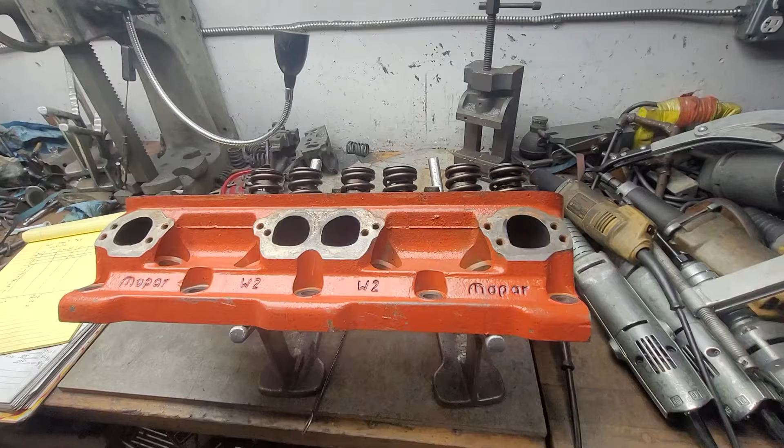Hey everybody, back here at Charlie's place, and we have here today a Mopar W2 head.

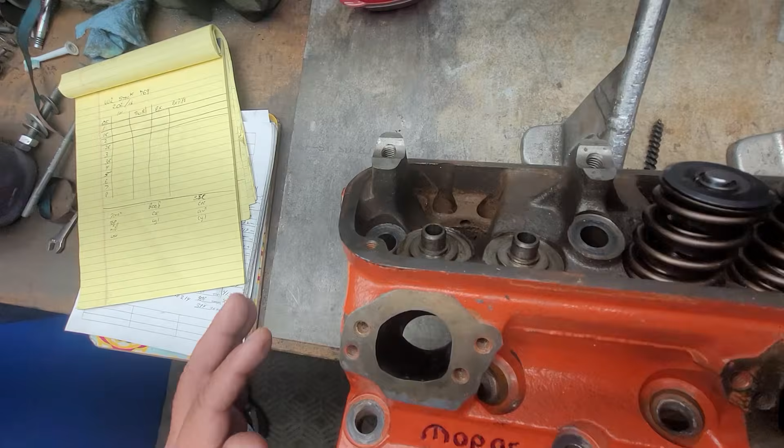This one is dual drilled for different size header flanges. It's the Econo version because it has the rocker pedestal stands in. The valve stems are 3/8. We didn't change them from what Mopar gave out and said to use. We'll see how they flow. These particular units are an open chamber design. I don't know how well you can see those, but we'll get to these later.

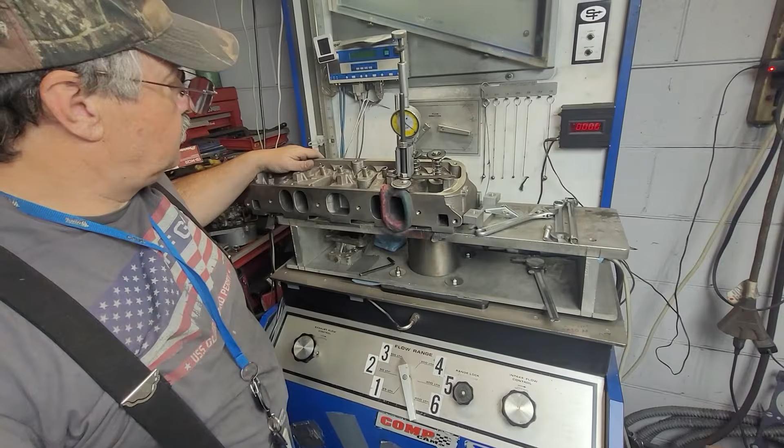Right now on the flow bench, we have an out of the box, never used, first time with valves in it, W2 head race version with the milled stands. So you have to put an aluminum stand here and then your rocker bar across. 2.02, 1.60, 3/8 stems. The boss is added on here to make them a little stronger, and they only have a single wide exhaust bolt pattern. This is a pretty stout head.

It's a 769 casting, and we're going to flow them, see what it does out of the box. No port work whatsoever. Fire in the hole.

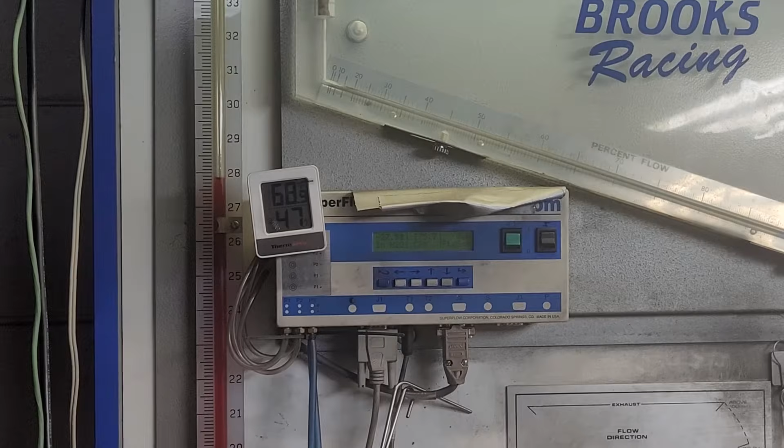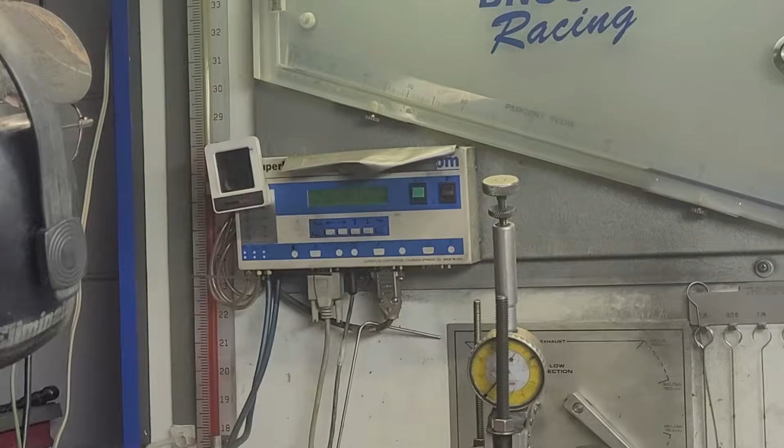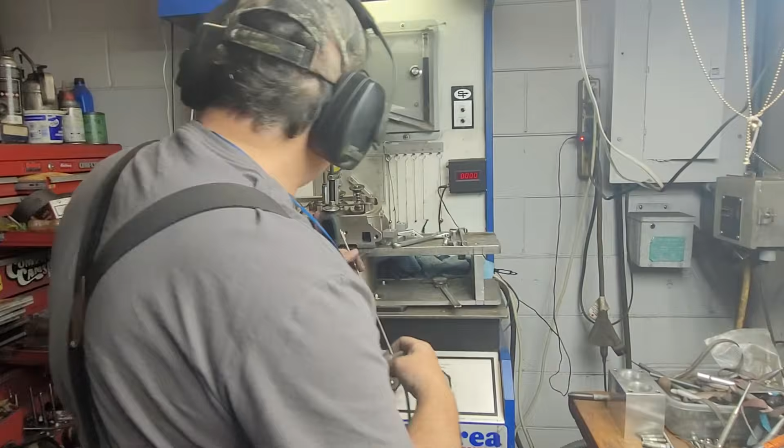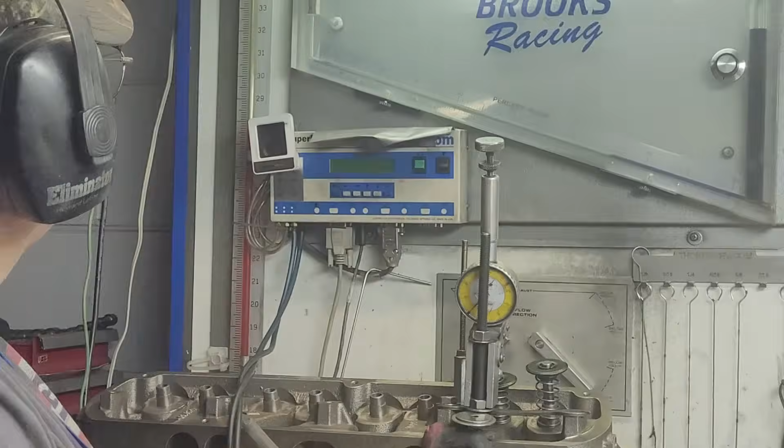Still rolling. All right. Pause it. Why don't we do the exhaust? Okay. Pause it. Unpaused, exhaust flow. Exhaust flow. Yep. Let's go. Pause. All right. Take two.

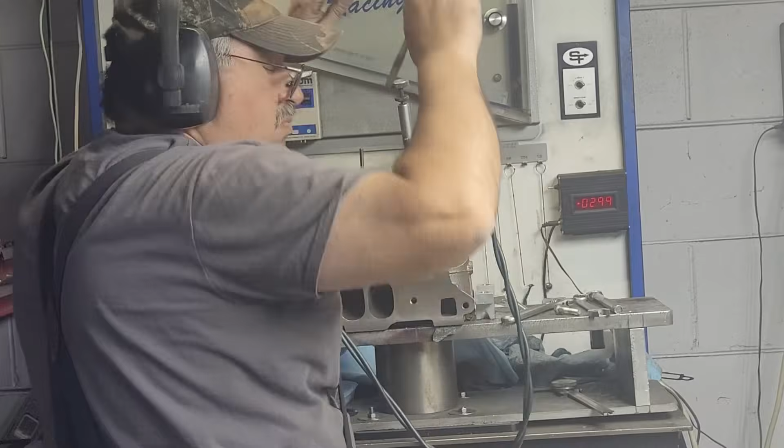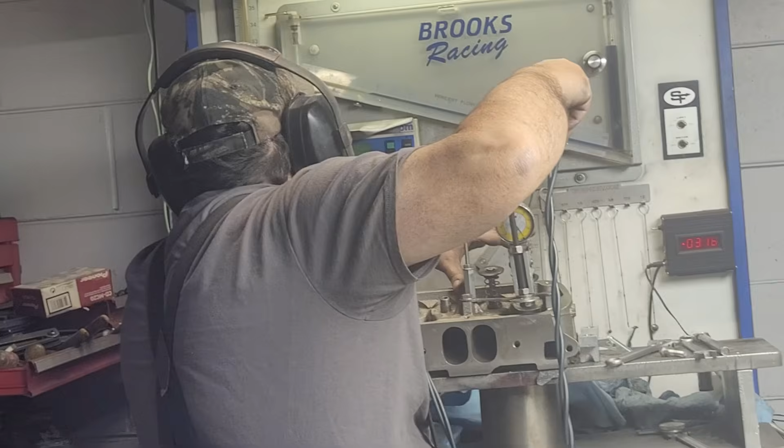All right, interesting stuff, guys. I'd like to thank Rob for bringing this by so we can have it as a reference. And when I first looked at it, first of all, absolutely love the head, right? Love it. I think it's a great design.

Rob, how many CFM did I say the intake would flow when I looked at it? When looking at it, you called 280. And how much did it flow? Well, the magic is 280.5. 280.5. All right, it was a lucky guess, but there was more than just guessing in that. Well, you do it enough, you kind of see things. Now, I definitely did not call the exhaust port. No, you missed it. No, I missed the exhaust port by about 80 CFM.

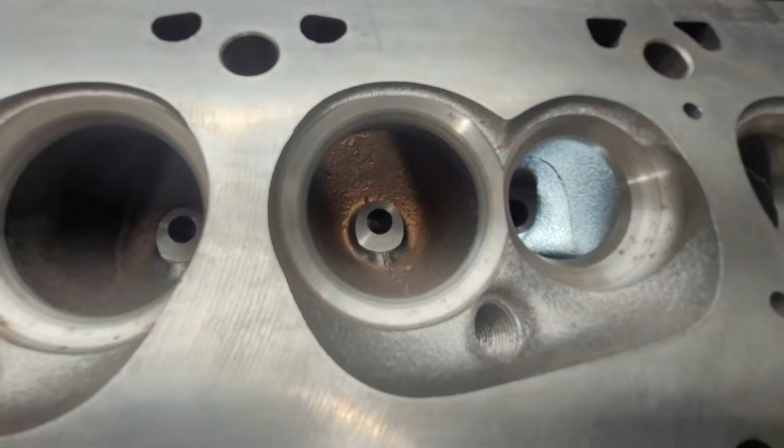The exhaust port, even though it looks like a great design, does not move a huge amount of air. Now, I'm willing to bet that's because of the way the throat was done. You know what we're going to do? We're going to pull it off the bench and we're going to take a look at it. All right, guys. Hopefully that wasn't too boring. Take a good look at these. These are really, really nice.

Now, some of the things we just took a quick look at, these are completely stock. So take a look at the valve job. All right, the throat ratio on the exhaust is really tight. It's only 81%. So that is definitely holding us up. And our intake throat ratio is 87%. Not as bad, but still a little bit below where we'd like to see it.

Okay. This is the valve job from Direct Connection. Is it Direct Connection or Mopar? Yep. Mopar Performance Direct Connection. Synonymous. This also has a different chamber. This has got a nice tight closed chamber. Really like the chamber on this. Depending upon what's going on, I would probably relieve these a little bit like I do on the Fuelies.

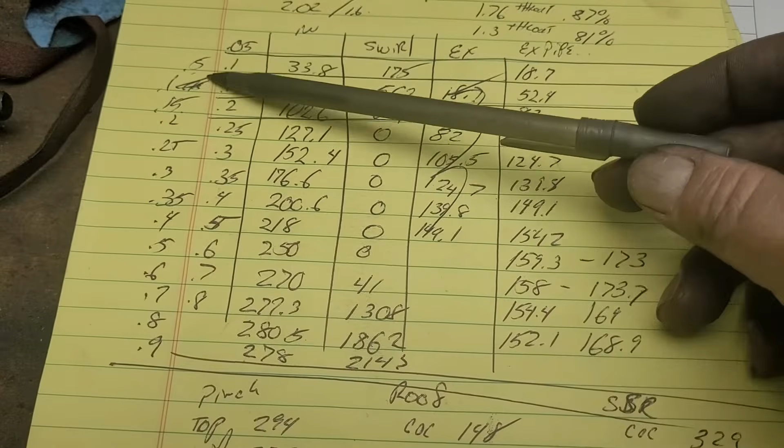I hate to do it, but I don't have a flow sheet. Wifey's having problems with the printer. So this is what we got. And yes, it's got a dozen mistakes on it because for some reason I wasn't able to keep the lifts straight. So this is no good here.

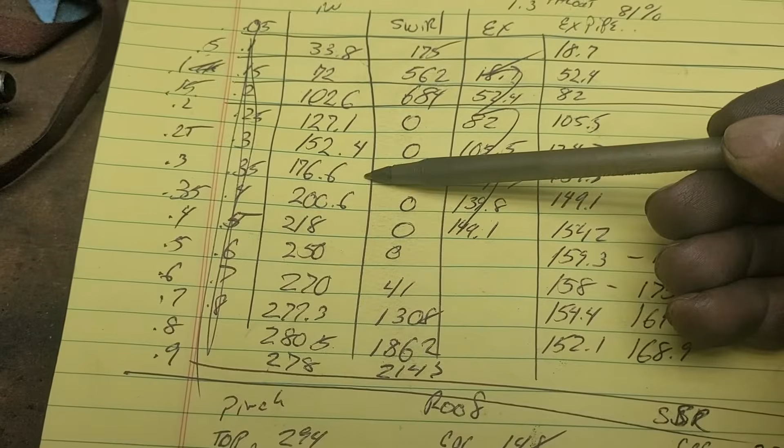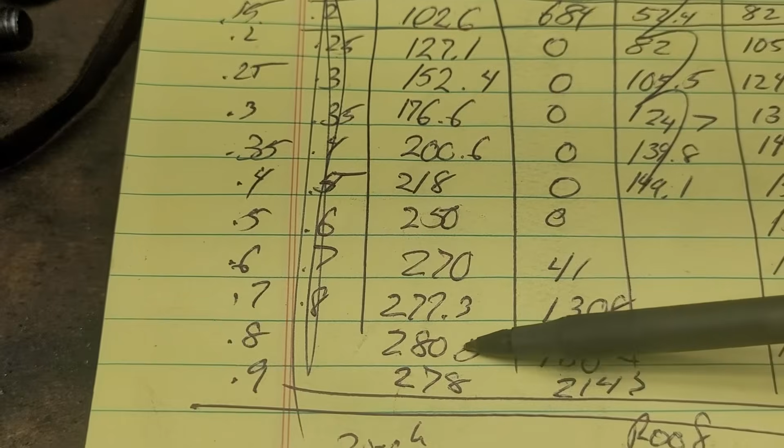Okay. Here are our lifts. This is where we are at .300. We got 176.6. Not great. I should take a look at the valves. Now the valve, no back cut on that intake. So if we add a back cut, we'll pick up quite a bit right in this mid-range here. Tops out pretty good though. Now, a back cut may lower that a touch. Depending upon the RPM that Rob's going to spin this, it would stay no back cut.

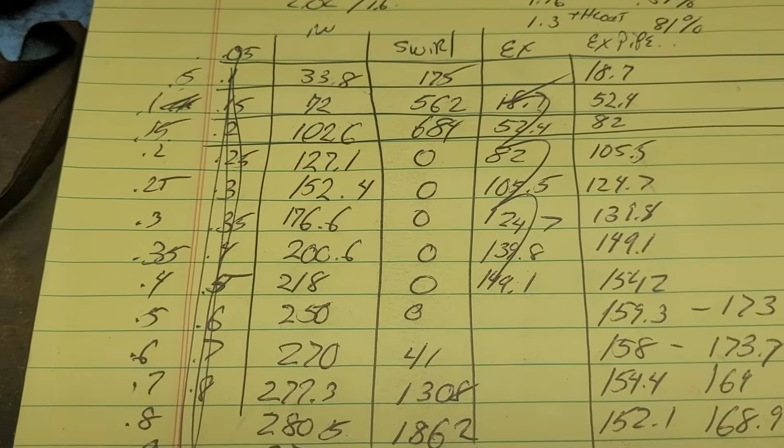Okay? He's going to be running this on a what was the combination you wanted to do with this? Tunnel ram duster. Tunnel ram. How many cubes? Yeah, that's to be decided, but more the merrier. I would like to get it around 400 plus cubic inches. Yeah. Okay. If I could bring the motor past 434, I'd be very happy.

Excellent. Take a look at the swirl. The swirl is kind of an interesting curve, right? 175, 500 and change, 680 something change, and then dead. Absolutely dead until she starts coming off the short side radius. That's something I would look at. I would definitely think about doing some work to this chamber and see if I can get that a little

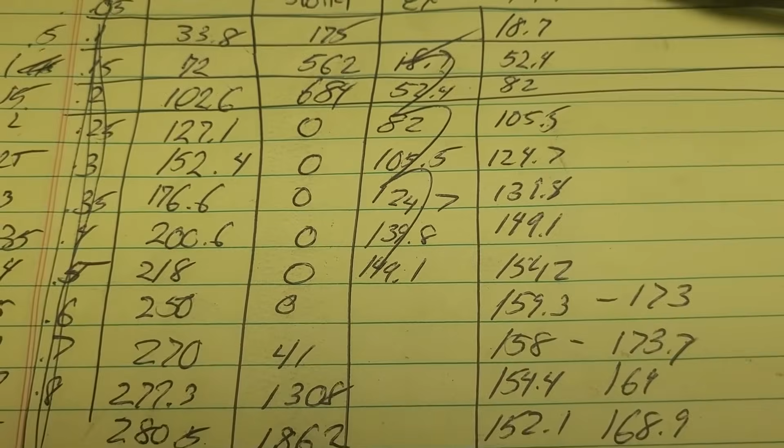bit better. As far as the exhaust, I thought the exhaust would do a lot better, but that really tight throat ratio puts a limit on it. I've noticed it didn't even go up a lot when you put a pipe on it. But even just taking a look at this, I'm willing to bet, guys, we're making about 600 horse on this naturally aspirated with a decent sized Chrysler engine.

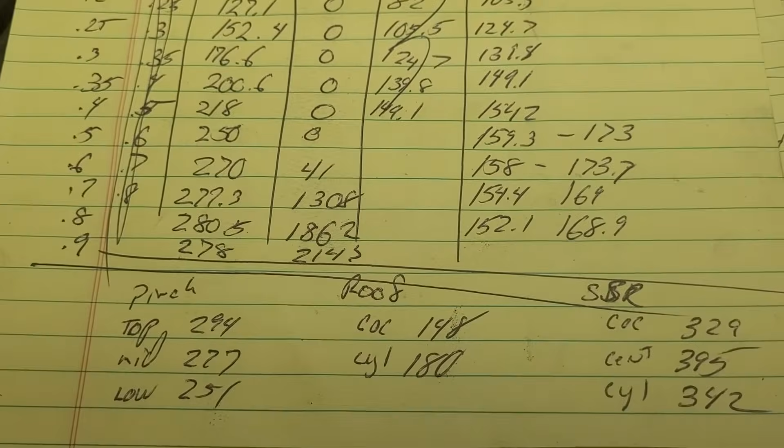All right. You got decent speeds across the pinch because the pinch was done really nicely on here. Let's take a look at that. Beautiful. Take a look at the pinch. There's hardly any pinch at all on these. Okay, so it's a really nice design. I even like the way they did the short side radius. And I'll flip the head over and you can see how they did it on the other side. They did a nice job on it. That doesn't mean it can't be improved.

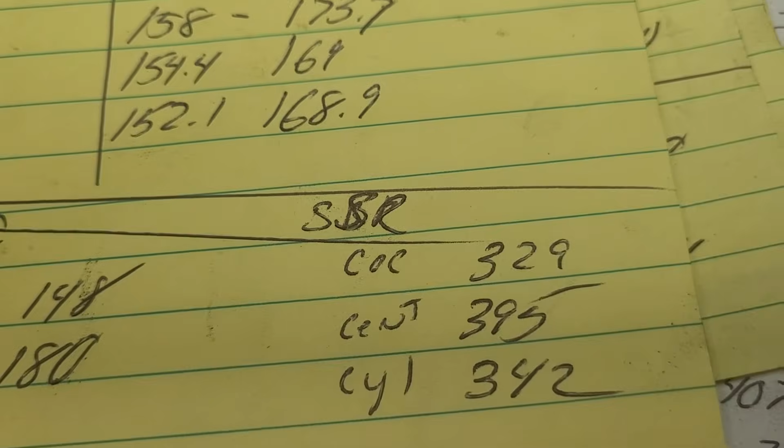So take a look at our roof speeds. Cylinder wall side is 180, center of the cylinder 148. That can be improved. See, our short side radius speeds are pretty good, but you still got 395 in the center. I'd like to see them a little more even. Let's take a look at that short side radius. The short side radius is done really nicely. It has a decent amount of layback on it, stock.

It does have what the heck's his name? Darin Morgan would call a hypercritical short side radius. There's quite a bit of a change in the angle right here. So that would need to be looked at. But overall, for a stock casting, it looks really good. It's also quite high. It's 1.2 inches high, that short side radius. And since it's a very heavy duty casting, I'm sure there's plenty of metal there. You could change that short side radius to get more top end flow.

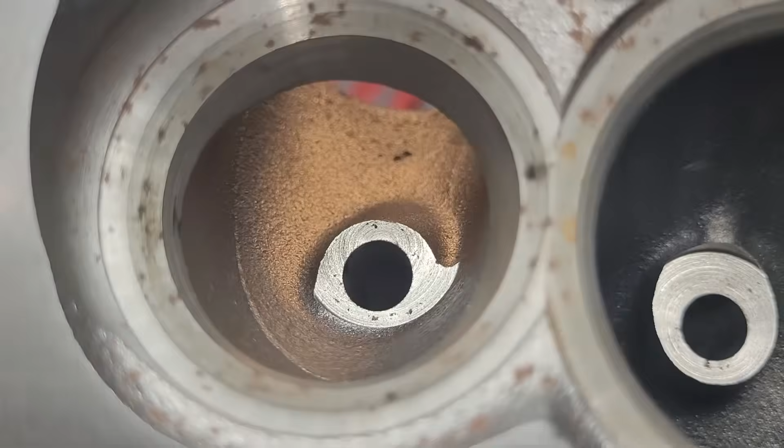The exhaust bowl is done really nicely. You can see how it bulges out on the cylinder wall side to give it plenty of room to pass gases. Overall, this really just needs a cleanup. I would put a radius on that, take that 60 out and put a radius right up to the seat. It's got quite a thick seat. It actually, if you take a look at it, it's got, I think it's about a 5 or a 6 angle valve job on that.

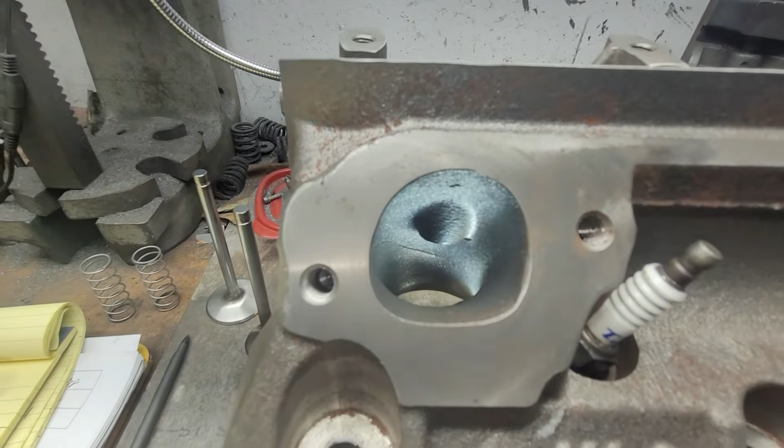Let's see if we can zoom in on that. Well, maybe not. But it looks like it's about 6 angles. The valve job actually looks quite good from the factory. I would just radius that bottom cut in. And let's take a look at the other side. Okay, the exhaust is a D shape, but it's like a little bit of an offset D. You can see these a little bit too.

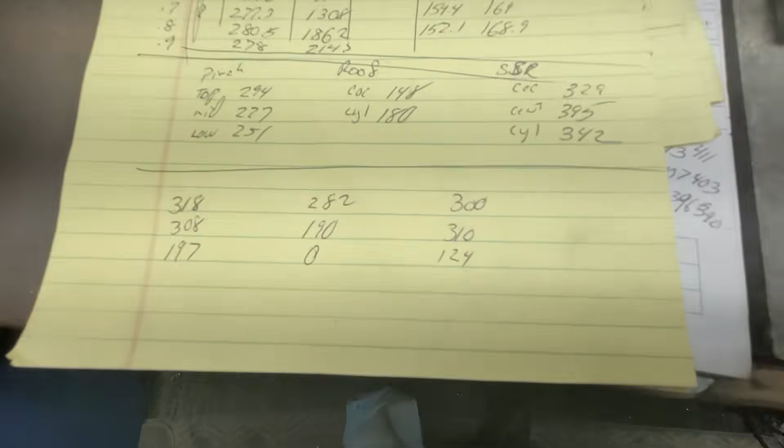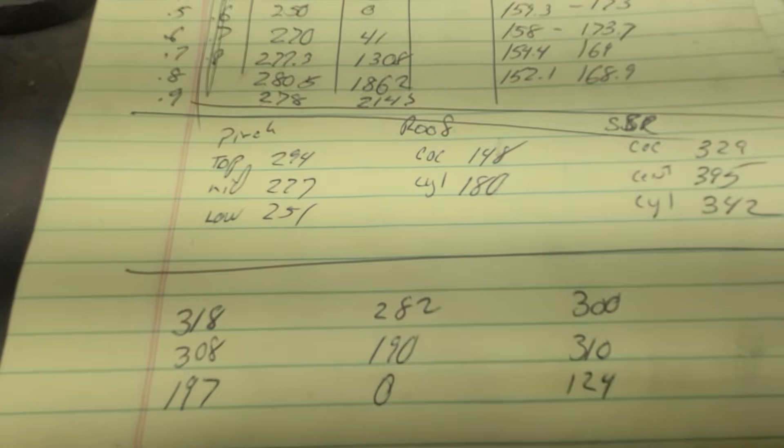Now, if we take a look at the air speeds they got coming out of there, that exhaust can be improved. The top looks good, the middle's not bad, the floor needs some serious work because look, we are completely dead in the middle and we're pretty dead on this side here. So it could use some work, but overall it's a really nice design.